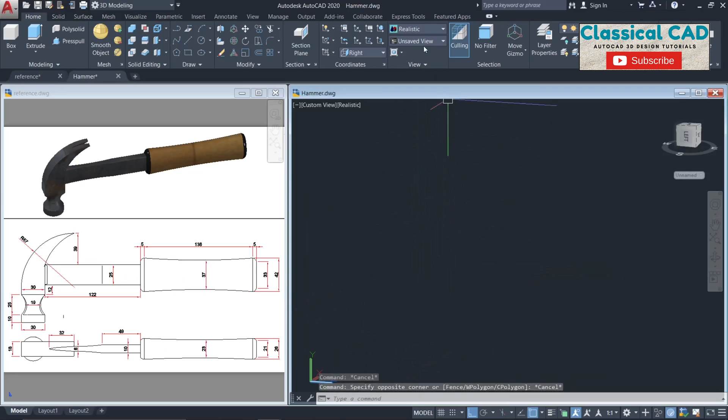Let's start by changing the view to top view. Make sure that your ortho is on. Make a line with a dimension of 138 units.

Okay, so we will work on this handle first. So for this part, we will do an ellipse, 42 and 26.

Change the working plane to right plane. Type EL for ellipse. Click this center. Click this point. And then, since this is 42, the computer is asking for the radius, so we will type 21 units instead of 42.

And then for this line, 13 instead of 26. And then another ellipse.

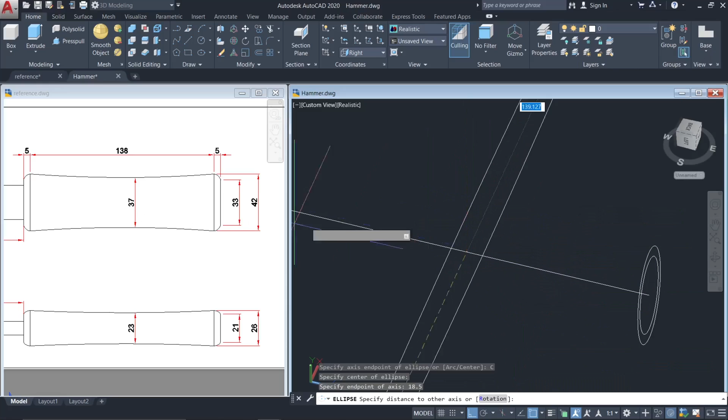Center. Click this point. 16.5 and 10.5 instead of 21. Okay, and then another ellipse, center, from this midpoint, make it 18.5 instead of 37 because that is the radius, and then 11.5

instead of 23. Okay, and then copy this bigger ellipse at the same location, so it will be 2 overlapping ellipses for this one. And then move the smaller ellipse by 5 units.

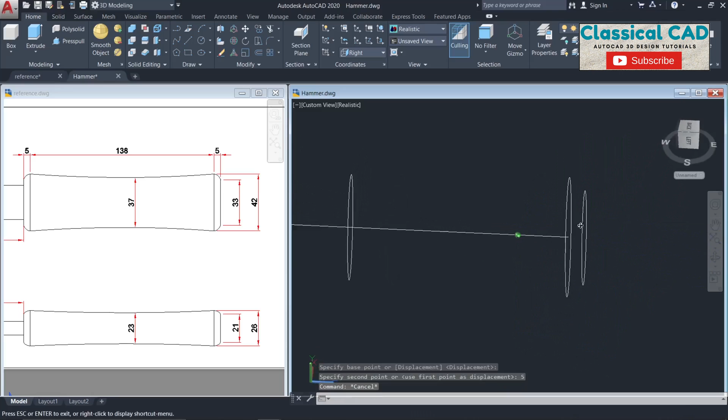And then go to front view. Mirror this. Click no.

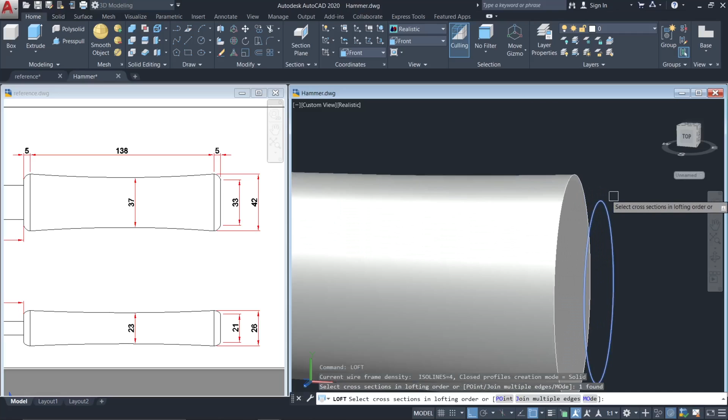Use the loft command. Select the 3 big ellipses, and then loft. Take this ellipse and then this one, also on this side.

And then make line. So we will now work on this part, the middle of the hammer. Make line from the center, 122 units.

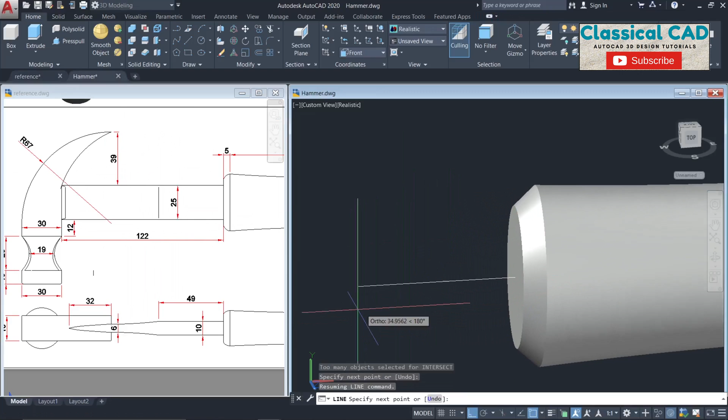This part. Okay, so for this one, we have to make a rectangle with a dimension of 25 and 10 units. Type rectangle. Click this point. Dimension 25 by 10 units.

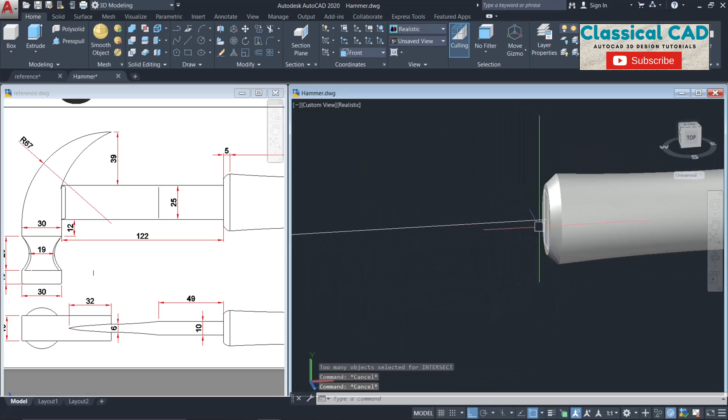Then rotate. Move from center to center. And then copy this by 49 units.

And then another rectangle. Change the working plane first to right. Another rectangle. Click this point. Dimension, this will be 6 by 25 units. Move from center to center.

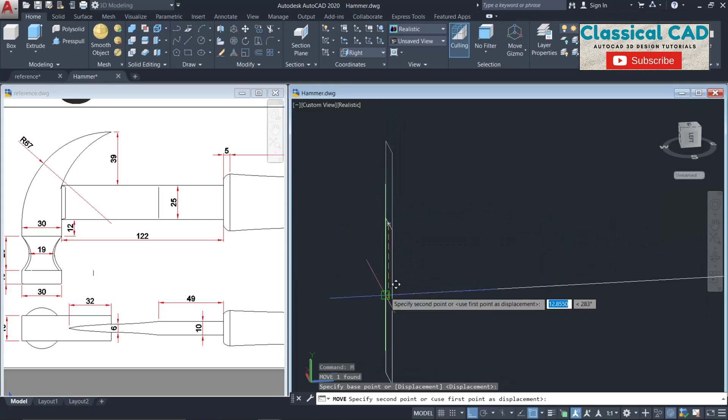Okay, and then now use the loft command. And then press pull until here. Okay.

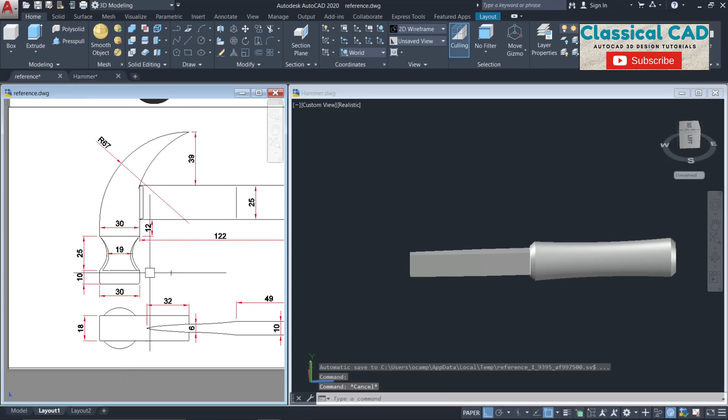Now for the head, for this part, change the working plane to top view, and then we will make a rectangle with a dimension of 30 by 18 units. Type rectangle. Click here. Dimension 30 by 18 units.

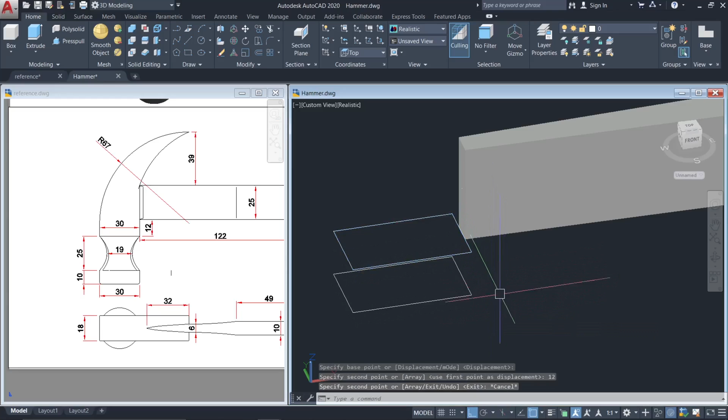Move here and then copy by 12 units. Okay, and then copy again by 25 units. This one, 25 and 12.

And then make a circle with a diameter of 30 units. And then copy this by 10 units.

Then make line in between the circle and the rectangle. Then make circle at the midpoint with a diameter of 19 units. This one.

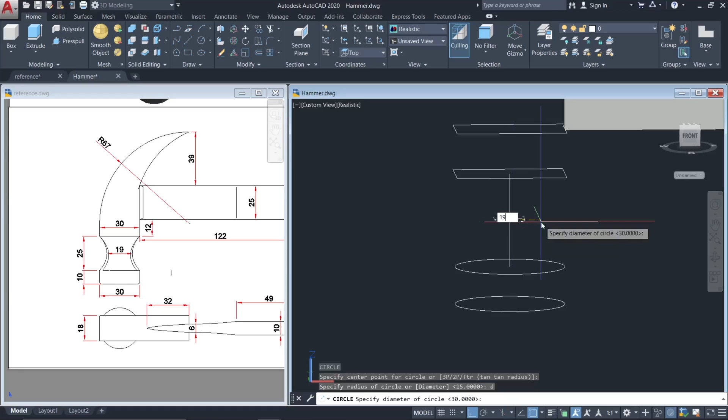Change the view to front view. And then for this part, make a construction line, XL. Move this by 39 units because of this 39.

And then make arc somewhere here at the middle, here. Click this point and then this point. And then make sure that your ortho is on and then type

134 units. 134 because that is the diameter. The dimension here is the radius. And then again, arc.

Click the end point. Click this perpendicular and then type 120 units.

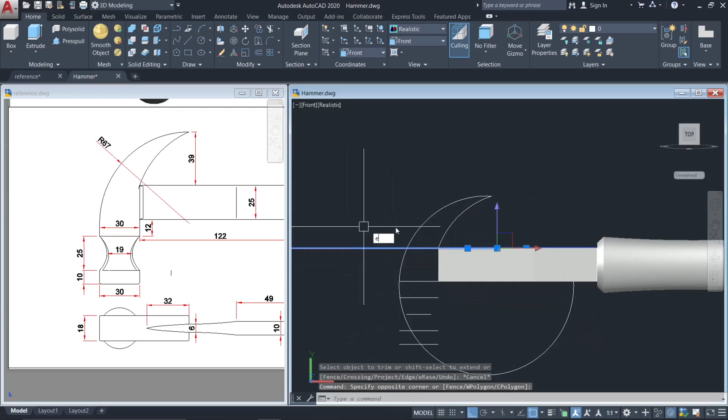Let's delete this one. Make a construction line. Trim. Let's trim this part. Delete this. And then we have to isolate these lines.

Move this by 100 units. Okay, so for this one, make line from this end point directly perpendicular to this rectangle, also in this rectangle.

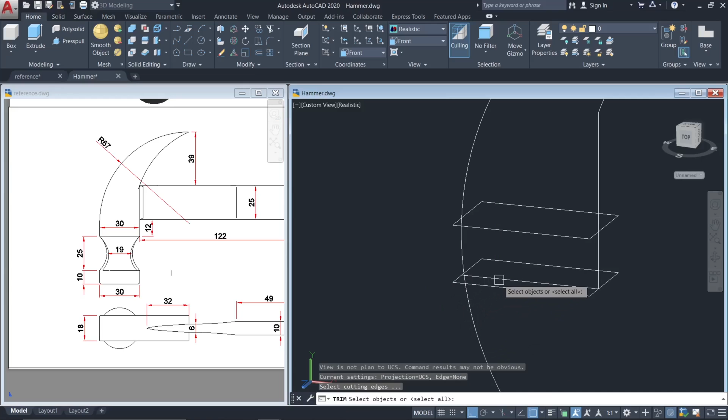So trim. Let's trim this arc. Click this. Enter. Click this. Trim again, and this one. And then join these arcs and line.

J to join. So this will now be one 3D line. And then move from this endpoint to this endpoint, and then move to its original location.

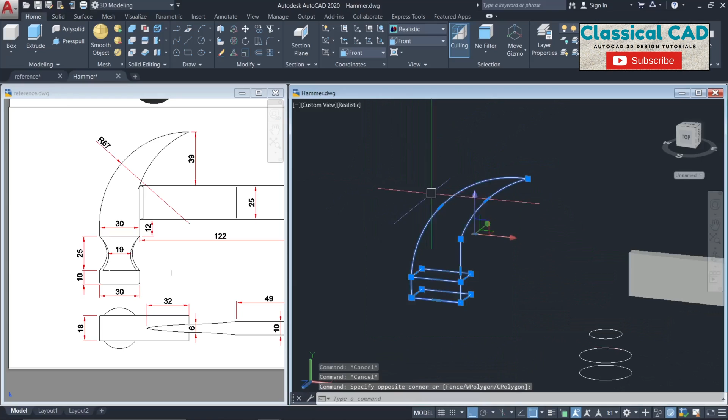Move this by 100 units. And then press pull. Press pull this part until this 18 units. Then make an adjustment on this rectangle.

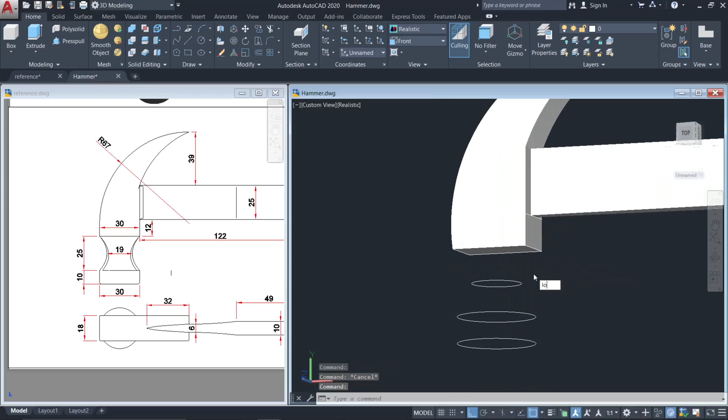The next command is the loft command. Select this rectangle, this circle, and then this circle. Enter. And then press pull this until this center point.

Okay, so for this one, to have an opening here, we have to make a triangle with one side of 6 units. Go to top view. Make line 6 units, and then make line again from here 32 units.

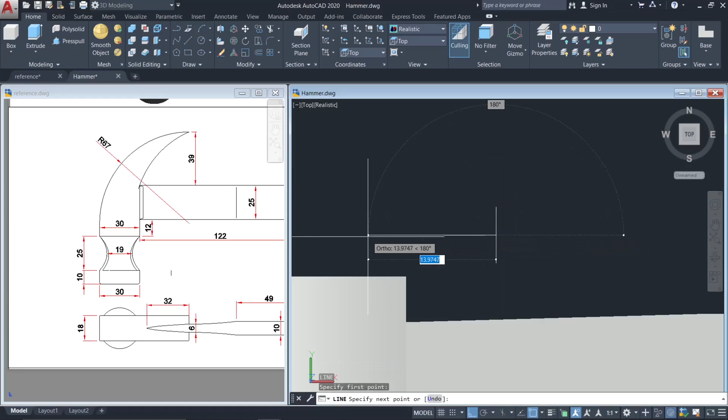This is the 6 and 32. So make a polyline and connect all the endpoints.

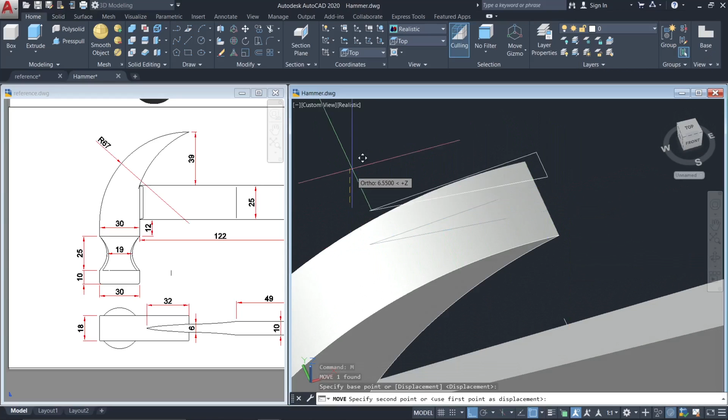And then move from midpoint to midpoint. And then move again. And then press pull.

Press pull such that it will pass over the 3D object here. And then SU to subtract. Click our hammer. Enter. And then click the object. Okay.

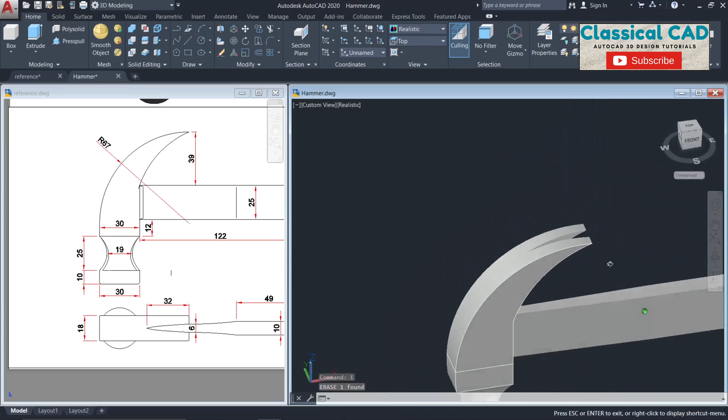So let's remove the 2D lines. Then delete. Okay, so go to solid. Fillet edge. Click this, this. Enter. Radius of 1 unit.

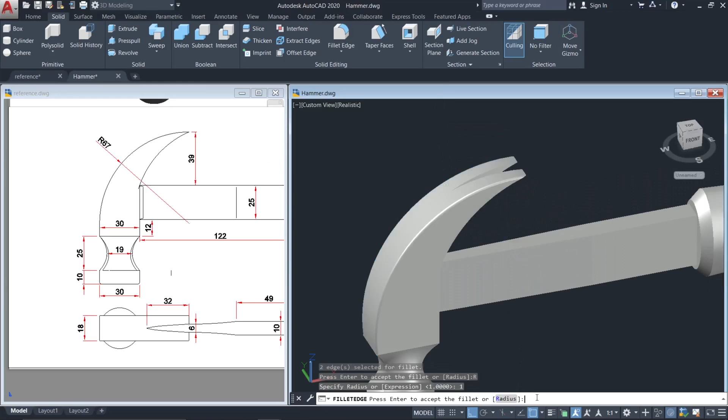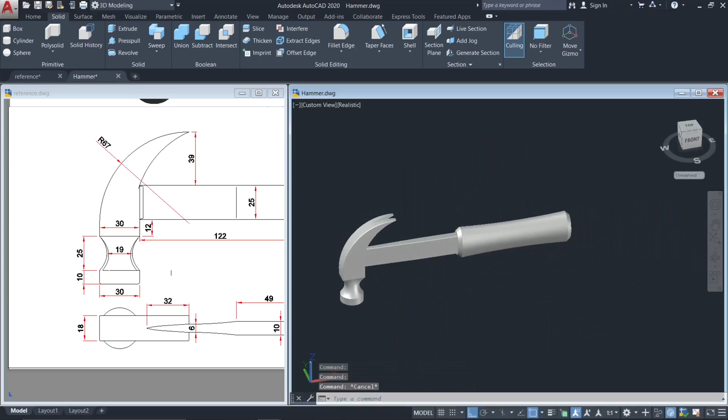So this is our hammer. To make it more presentable, go to material browser. Then for the metal, let's try this oxidized.

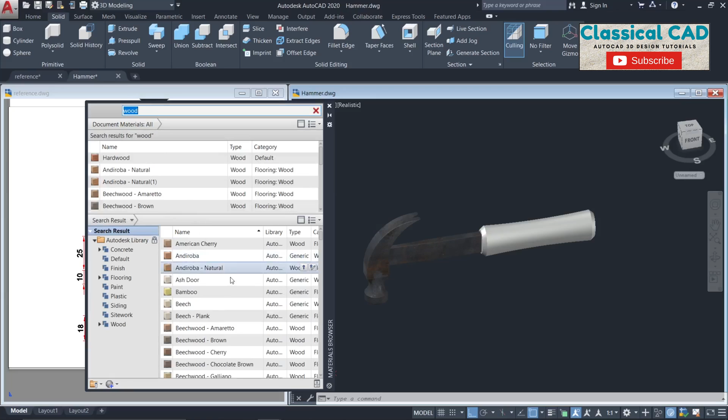And then for this one, type wood. Let's try this. And then for this part, for this two, let's close this one now. Go to properties. Let's make this one something like gray.

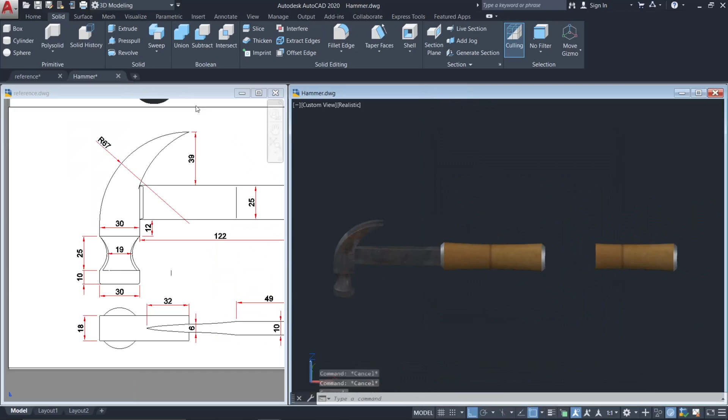Okay. So this is now our final design for the hammer. We have the rusted hammer here and then wooden handle.